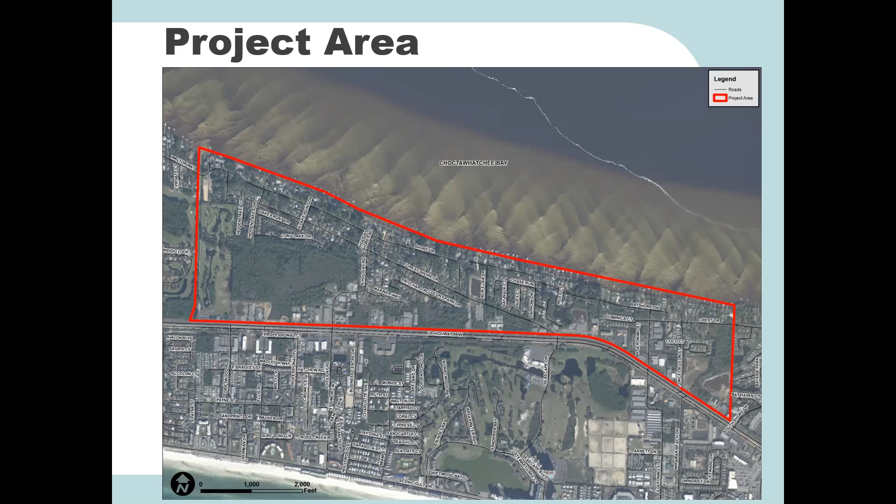Our scope of work included looking at 3 areas. We're looking at pedestrian improvements, and those will generally occur from Highway 98 going north. We're looking at drainage improvements because we are aware of some areas that were identified as having localized flooding in the area. And then last but certainly not least, we're looking at different projects that can be implemented to improve the quality of water that's discharged to your bay.

So we did a feasibility study and a preliminary report that addressed these 3 areas. And so now I'll let Kelsey get into the details of what we did and what our recommendations are to the county, and we'll wind up with talking about the first phase that we're going to implement.

So we put together conceptual plans as part of this feasibility study. The goal during design will be to minimize the wetland impacts and to avoid utility conflicts. And throughout these 12 corridors, what we did is we put together 4 typical sections, and I'll go through the details of those here on the upcoming slides.

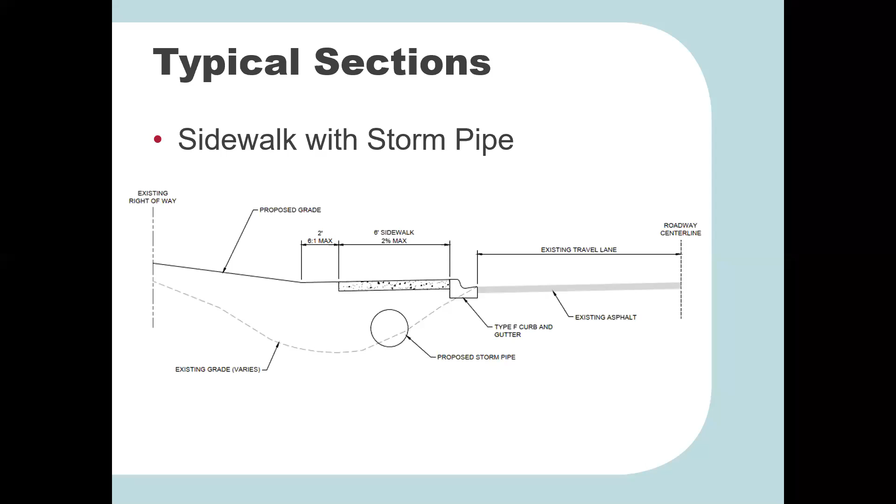The next typical section we took a look at using was a sidewalk with a storm pipe. This was generally used in an area where there's a swale today, but there's not enough room to relocate the swale within the existing right-of-way.

The next typical section we looked at was a raised sidewalk with curb and gutter. This is typically used where there's a safety concern, where there's not enough room between the edge of pavement and the proposed sidewalk. So the sidewalk would be adjacent to the road with curb and gutter.

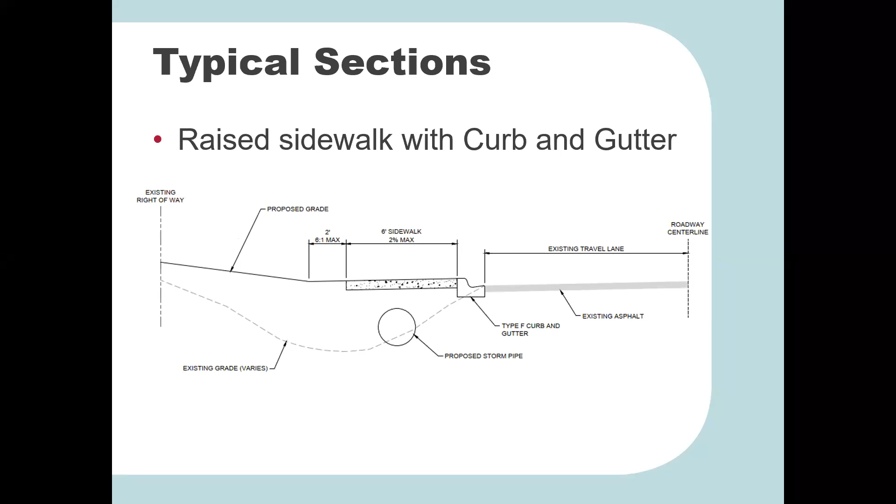Last but not least, a typical section that's an at-grade sidewalk. This would be in an area where there is no swale today, no known localized flooding, and we have an at-grade sidewalk separated from the road by about 6 feet, tying back into the existing grade.

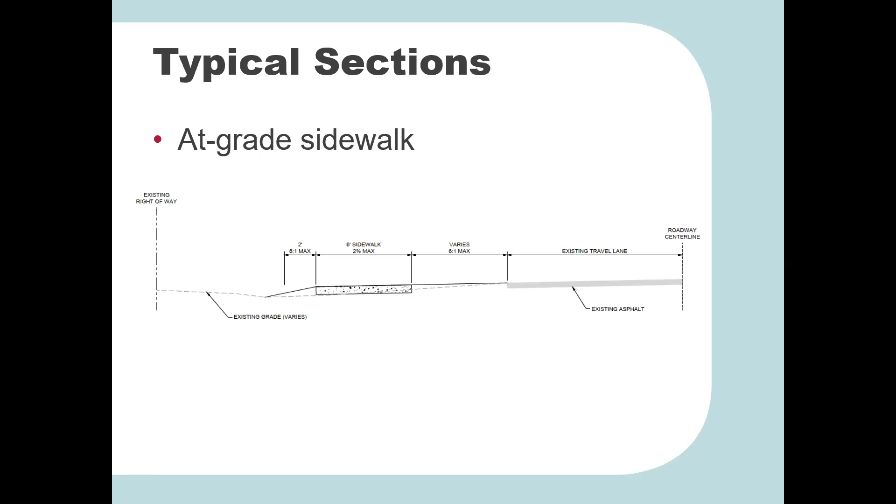As Debbie mentioned, we looked at stormwater as well. We evaluated 9 different sites, doing a desktop review for these stormwater improvement sites. Of those 9 sites, we took 8 and evaluated them further, performing water quality analysis. That analysis took into account the annual rainfall for the area and the land uses associated with each of the drainage basins running to each site.

As Debbie mentioned, there are identified localized flooding areas. We evaluated 4 areas as part of this project, though we know there are many other localized flooding areas within the project area. We reviewed Pritchard Road, Mariner Way, an easement off of Crest Drive, and approximately 641 Bayshore Drive.

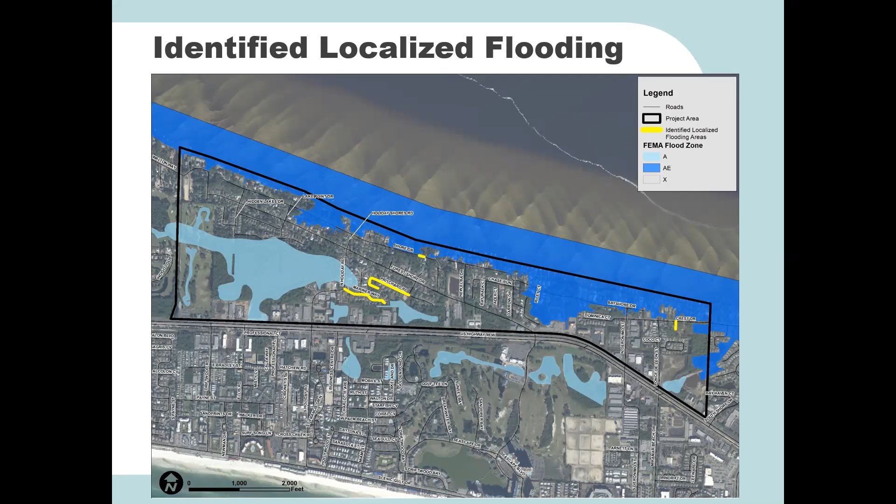Going back to the stormwater improvement, we put together a water quality improvements decision matrix. In that matrix, we evaluated things for each alternative such as potential wetland impacts, maintenance requirements for the proposed improvements, the need for property acquisition, whether the county already owns the parcel or there's an easement located in the area, a cost estimate for each alternative, and the nutrient removal amounts—how much nitrogen and total phosphorus could be removed.

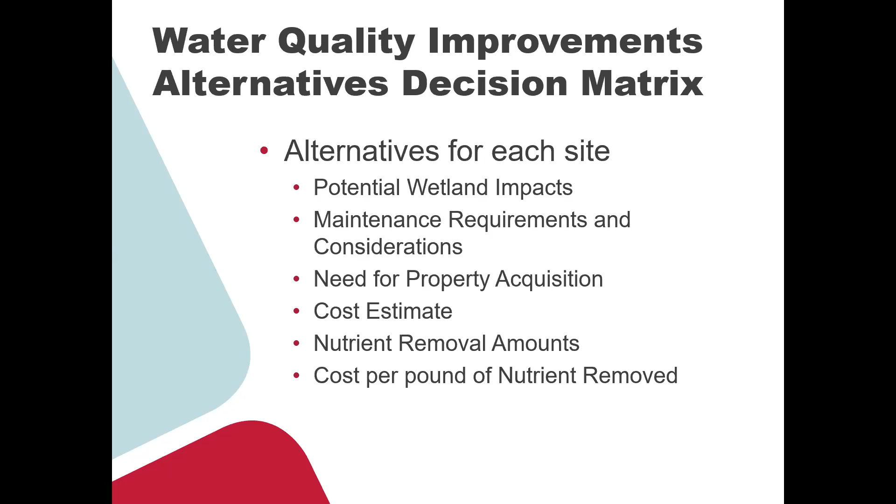And then the cost per pound of nutrient removed, which took into account the amount of nutrients removed over the life of the proposed improvement. With this matrix, we put together a grading scale, grades A through D—grade A being a stormwater improvement that was implementable with high total nitrogen and total phosphorus removals, and D on the other end of the spectrum, difficult to implement with low removals. Our recommendation to the county in the feasibility report was to implement all sites with a grade A.

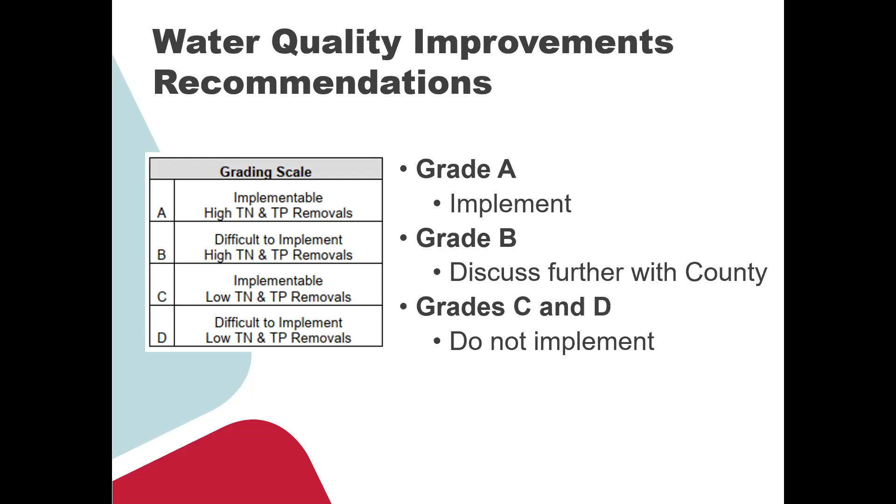That brings us to the proposed phase 1 project. As part of phase 1—I'll have a map here in a minute—site 4 and site 6 were identified as proposed phase 1, with stormwater improvements proposed as well as pedestrian improvements.

Site 4 was at Legion Park, and the grade A alternative was converting the dry pond to a wet pond, generally within the same pond footprint that's out there today. Site 6 included adding a nutrient separating baffle box with an upflow filter that will remove total nitrogen and total phosphorus before it discharges to the bay.

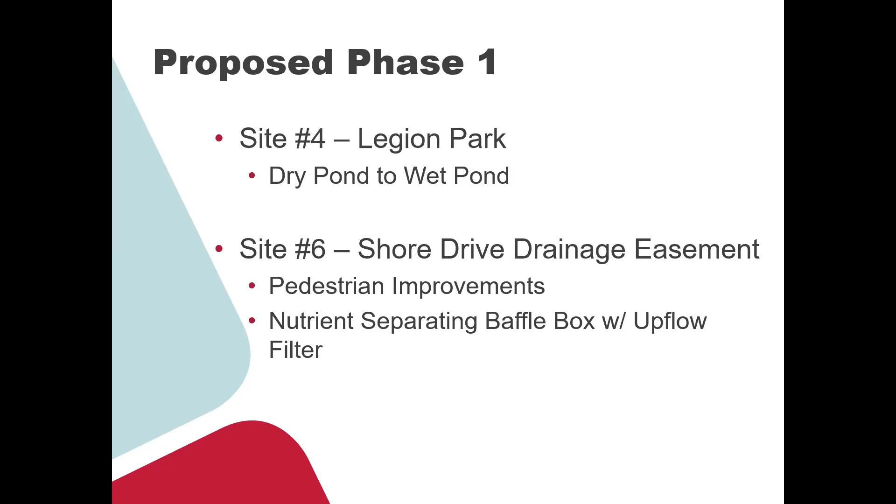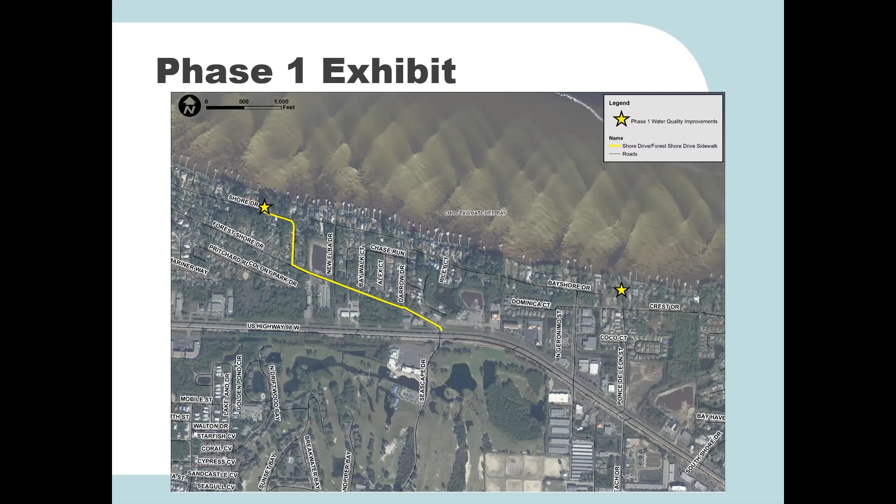Paired with site 6, we'll have pedestrian improvements running along Forest Shore and then along Shore Drive up to site 6. This sidewalk will run along the north side of Forest Shore, cross over Shore Drive, and then run along the south side of Shore Drive. The baffle box will be located on the north side of Shore Drive, where there's an existing drainage easement and an existing pipe that discharges to the bay. We're really just retrofitting that pipe to remove nutrients before it discharges to the bay, following the same route it goes today.

And so I had mentioned the pedestrian improvements along Forest Shore and Shore Drive. I have the typical sections here. So the majority of the sidewalk will just be an at-grade sidewalk with a small V swale to direct water so that it's not ponding on the sidewalk or causing any issues in the adjacent yards. And then that's along Forest Shore and Shore Drive.

And then in some instances along Shore Drive, there is a swale and some cross drains that are out there today. So with that, the swale will be relocated within the existing right-of-way. We've taken a look at generally where the right-of-way line is, and that's the typical section that seems to fit best. The existing cross drains that are out there will remain or be shifted over, and we'll look at those on an as-needed basis during design once we have survey.

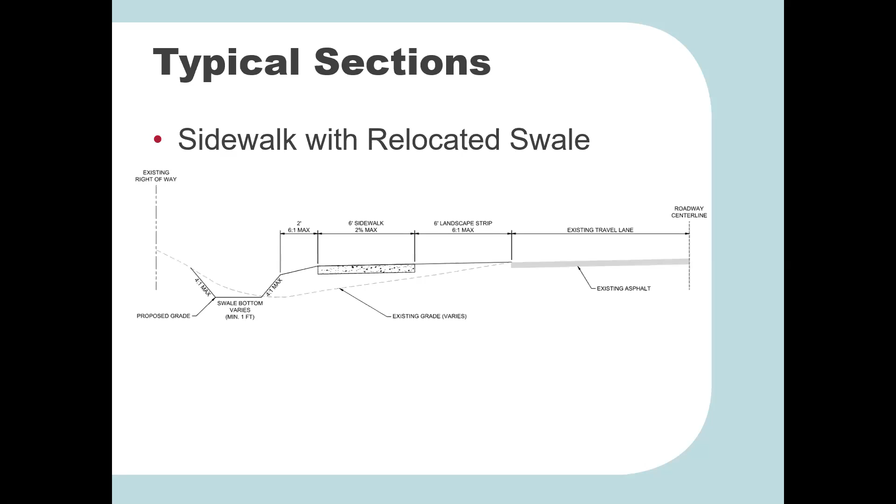Considering the phase one design, it would be cutting into Shore Drive and not extending into Forest Shore, furthering it west. But is there any kind of time frame that would be talked about or discussed to improve that?

Mr. Davis, this is Chance again. You're located in between the Shore Drive connection to Forest Shore and the Holiday Road intersection.

Yes. I'd like you to know that the issues we identified and met with you about recently, we've got some drainage improvements scheduled for you within the next few weeks, where we'll be doing some short-term drainage relief for you in that area of Forest Shore.

I believe the sidewalk connection and overall drainage improvements for that area between the Shore Drive intersection and the Holiday Road intersection would be at some future phase beyond 1 or 2. Maybe phase 3, the sidewalk connection continuing all the way down Forest Shore.

That would then connect with the improvements done during phase 1 and 2, pushing into the project area with the pedestrian improvements from Highway 98, and that would connect the gap that had been created between phase 1 and phase 2.

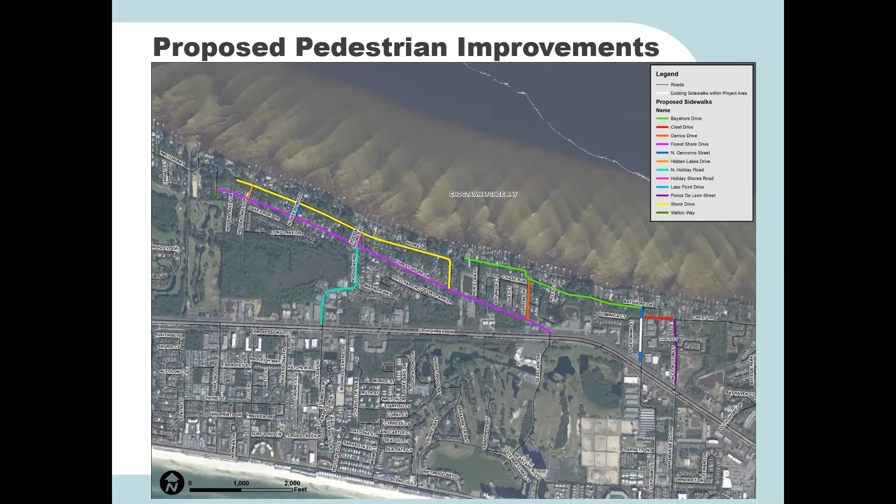Yes, it is. Chance, on site 1, isn't that the property they're looking to develop right now? I believe that's the site they're looking to get a land use change on. Okay, good, because they want to develop on it.

If they develop on it, and it's a potential stormwater improvement location, what kind of impact does that have? That was a site we looked at, but we did not make a recommendation to implement anything on that site. Ms. Johns, we did a desktop review. That was one of the nine sites we did a desktop review on. And then of those 9, site 1 did not have further analysis done on it.

Okay, at this point, correct? I remember talking to Miss Lewis and Miss Preble about this. It was the location of that site, the grades, and the opportunity to get stormwater to that location for treatment, and then continuing it on ultimately to outfall to the bay. The hydraulics just simply didn't work to provide the benefit that would be needed to justify the purchase of that property.